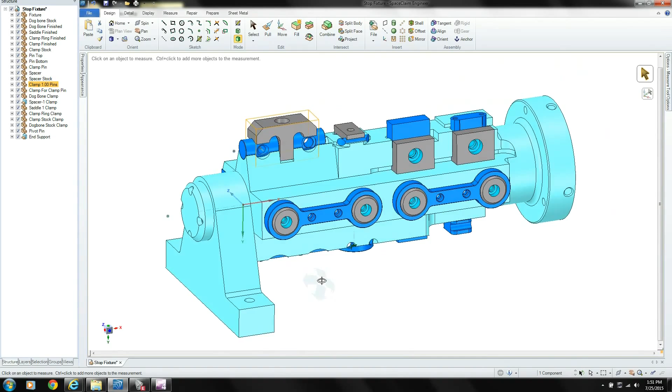Okay, and now we're going to get into a little CAD and CAM programming for the machine. What you're seeing on the screen right now is a model of the fixture that I've drawn that we're going to use to make the parts for the mill stop. But right now we're going to be focusing on this clamp right here that holds the two pins on the fixture. And in order to machine this, what we have to do is we have to open the part up.

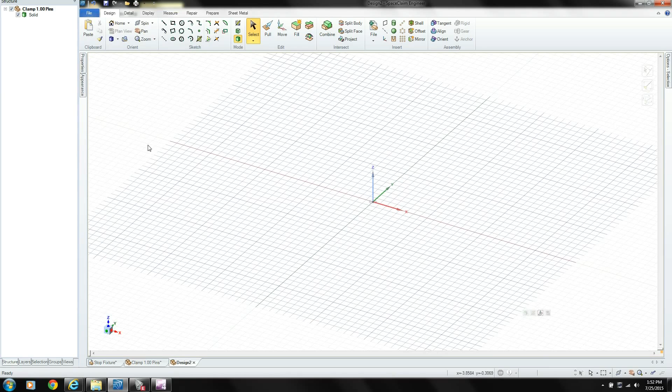So we'll open the component by itself, and you can see where the world origin is in relation to this part. We would have to move it in order to machine it, but we don't want to move it here, because if we move it here, it'll move the part in this assembly, and we won't want to do that. So we have to start a new design, they call it here, just a new file basically, and we got to go back to the part here, select the solid, copy it, go back to this new design, and paste it.

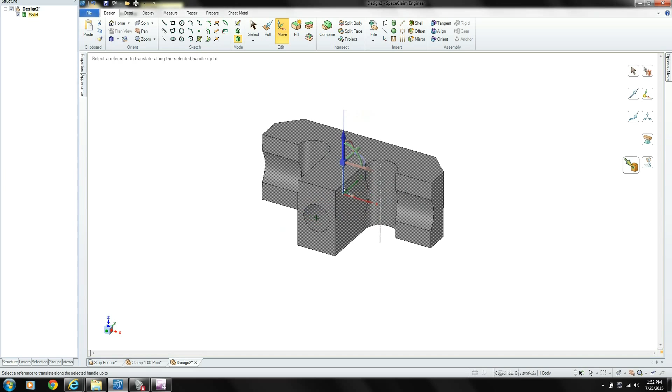Now we can move it, and it won't move it in the model because we're basically making a new design here. So we're going to move it to the world origin to begin with, and then we're going to select this top face, and we're going to move that face down to the origin point. So that would be our Z0 in the machine. And then we're going to select this face here, and we're going to move it to the Y origin.

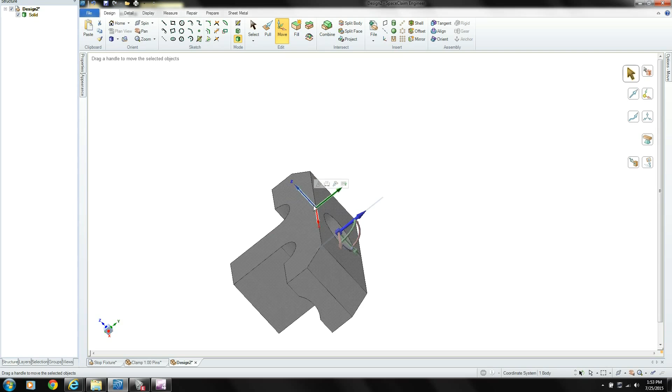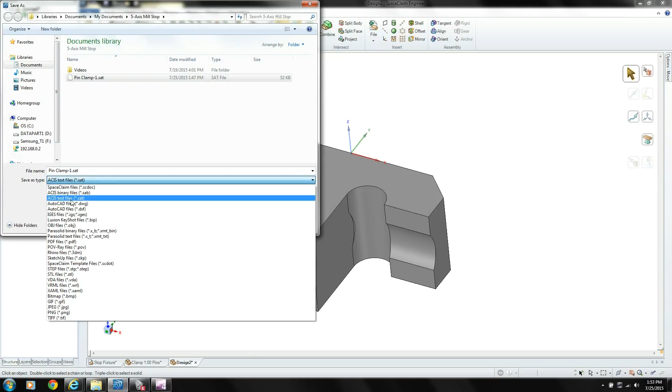Oops, not like that though. We got to select the whole model, and then we got to select the face, and then we got to move it over here. So now we have it repositioned for the machining, and then we're going to go over here and we got to save it. Actually, I had one already saved here, I guess, as this pin clamp -1 SAT. We're saving it as an SAT format, ACIS text file format, so that we can bring it into the CAM software.

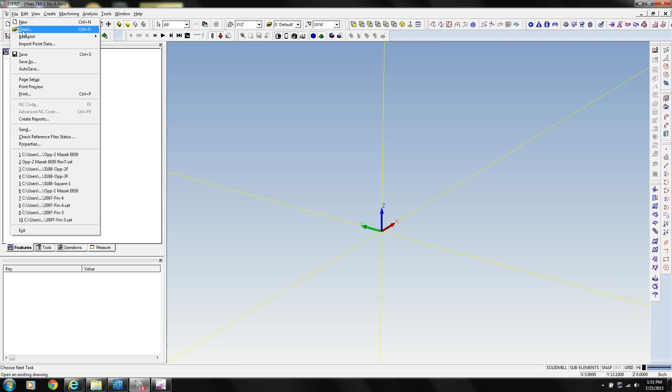Okay, now that we got that done, we can go over here to the CAM software. I already had it open, and we're going to start a new file, and we're going to use the template for the little Haas TM1 mill that's behind me here. So we're going to open that up first, and then we have to merge a file of this model into it. So we got to scroll over to where I saved that right here. Here it is. We'll import it into the software.

Okay, now I'm going to select this model, and I'm going to put it on the solid model layer, just so we can organize things a little bit here. Then up here I'm going to select the geometry layer, and we're going to make wireframe geometry of this model, which in this software, the Esprit software, they call smashing it. And you got to make sure you've checked wireframe and you got some kind of tolerance here, and then you say OK.

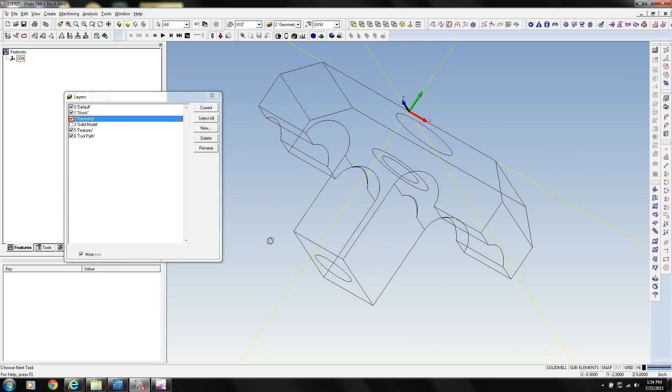If I turn off the solid model here, well, it should be on that layer. Let's see where it is. Yeah, we should be able to see the wireframe geometry by itself. Actually, we're going to use more of this wireframe geometry in this case to machine with, rather than a solid model. I'm going to put this on the feature layer. In a minute we're going to define some features for machining around this.

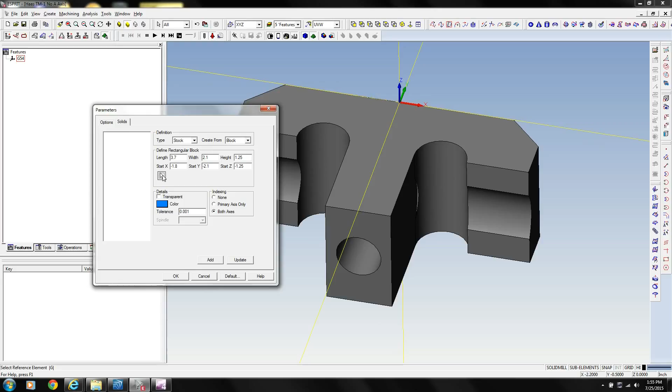For right now, we're going to define the stock for simulation, which is going to be here in this software. And right now it's set on block, so that's what we want. So we're going to select the model, and then it's going to put a block around that model that is the actual size of the model, but that's not our stock size. Actually, our stock is a little bit larger than this. The thickness of our stock is exactly what we want to machine, but the

width of it, if I measured it here, is say about 2.1 inches, and this is the distance from here to here, and where this starts is minus 1.9 right now, but actually that's the total width of the part, so 2.1.

I'm doing this on the calculator right now so you can't see it, but minus 1.9, and we divide that by 2 plus 1.9. It's going to start at minus 2 inches in Y, and the length of this material, if you measure with the calipers here, is about 3.7 inches, and half of 3.7 is what, 1.85, and we got to add that, so we have a stock up here.

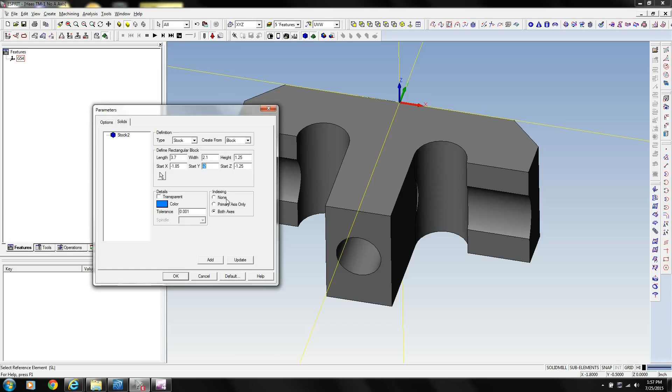And we say okay. So now we should be able to start the simulation and see that, oops, I got something wrong. I got to change something here. Minus 1.85. And we have to update that. And we say, okay, now our stock should be in the right place for our simulation.

Okay, the first thing we're going to need is a trim profile of the stock in order to trim our tool path off to. It'll be easier just to draw a simple profile to do this. So we'll select a line and we'll offset this.

Remember, on our stock definition it was 2 inches this way, and then it was 2.1 that way, and then this was minus 1.850 this way, and 1.850 this way. And we're going to trim off, or we're going to actually keep what we want here.

Now we're going to define a manual chain, they call it in this software. It's a feature just of this stock profile. We're going to rename that stock up here. It doesn't have to be named anything, but we're just going to do that so we can keep track of things. And I'm going to change this to the features layer here just to organize things a little bit.

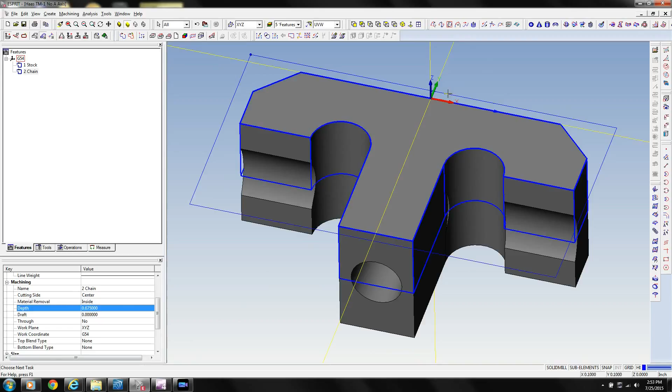What's going to be holding the part down, we're going to machine that radius here and this radius here later, and that's really the most critical part of the whole thing, and maybe the hole being on center line. The rest of this is just a clamp, and it doesn't really make too much difference. So we're going to do it half and half and just flip it over, run the same program.

So we want to eat out some of this stock here in these corners. Otherwise we'd be milling a full diameter cut through these areas, and we don't really want to do that. So let's define extra profiles so we can cut out some of this stock here. I'm gonna turn this selection to just geometry, so this makes this a little easier to do, even though it doesn't seem to do it sometimes. So

we're gonna take that profile, and we're gonna also go down 0.675 with it, and then we're gonna make another one over here, just the same thing basically, continuing on around the part, but we just want to take these corners and rough them down separately, and we'll trim the toolpath to this stock profile that we have here.

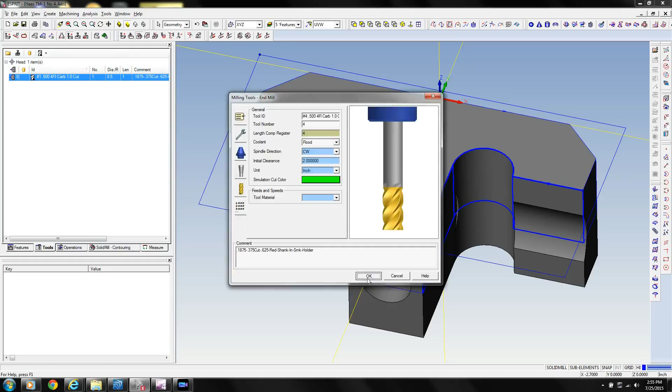So let's just do the first one here, and we'll go over here and we'll call it, I'll tell you what, let's see if we got a tool defined. I defined this tool earlier. I'm going to change the tool number to 4 because I noticed I have a number 4 tool in the machine that's already the right size. So we're going to do that first. Then we're going to go back here to the contouring. We're going to reselect that, and we're going to leave those alone.

And I think we'll make this, let's try 4 passes going inward. That's going to be 4 passes. Well, you'll see in a second. And I'm going to go down the depth first and then move outward instead of doing the width. You'll see how that's different. I can show you both ways just so you'll see.

Finished stock allowance, say 10 thousandths. We're not going to put any finished stock on the floor because we don't care. There's no floor here actually. And these are the lead in and out movements. It'll start 65% of the cutter over. We might have to increase this to miss this stock. In fact, let's try 80%, and here we'll try 20% of coming outward. Let's just see how it looks.

For some reason it doesn't like my tool selection here now. I think because I changed the tool in mid. Let's just reselect it. It brings over the same information on these things. Shouldn't have to keep refilling it out on the... oh, I gotta select the trim feature here. Okay. So that's the toolpath for this. Let's see what this looks like on the simulation on this side. Slow this down. See, it's hitting right here, so we gotta increase the...

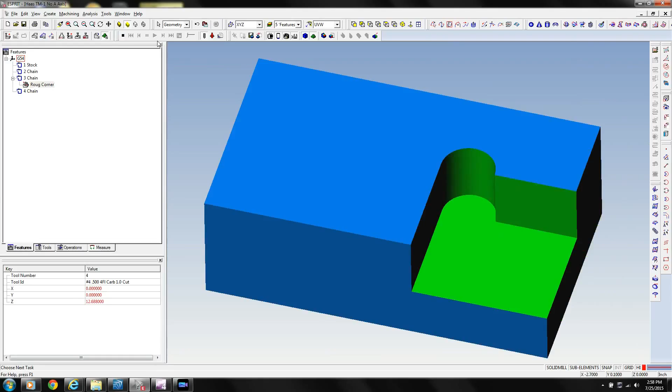I'm gonna rename this. It brings over the name that it was last used on the last program, so to rename it there. Let's go 100% of the tool, and we'll go 20% feed out dimension. Just see what that looks like here now. Okay, that looks pretty good. I'm thinking to rough this, maybe we won't take that deep a depth of cut. We'll go equals 0.675 divided by 5. We'll take it in 5 cuts down, like that.

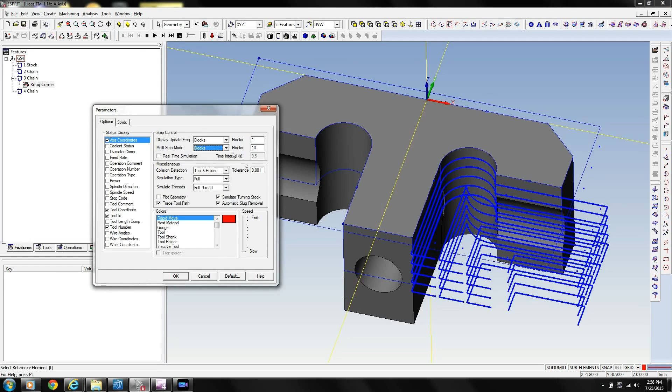I'm going to set something here so we can actually see this simulation. It's doing it every 10 moves, and we want them to be able to see it. Just slow it down a little bit. So we're just getting rid of this material in the corner here, so we don't have to have a chunk of material dropping off on the second side, basically, is the reason. Okay, that worked pretty good for there.

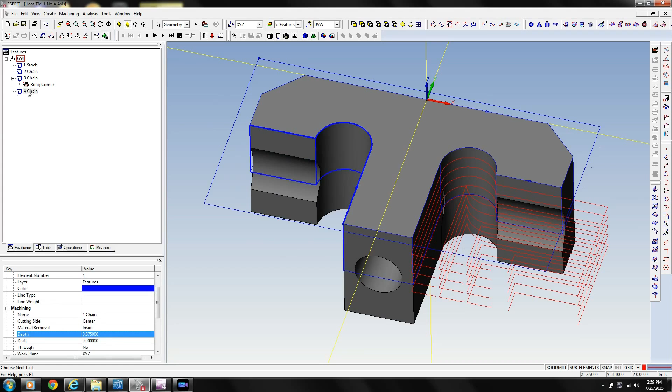So what we're going to do, we're going to take that and we're going to copy it and we're going to paste it on this other profile here. Let me do that again for some reason. I'm not sure. Oh, I don't have any depth on that profile. That's my problem. That's why it didn't give me any depth. 0.675, right? Forgot to do that. Now it should give me the depths.

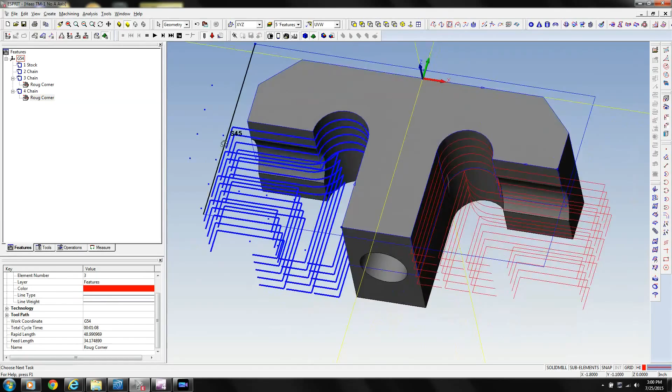And I'm thinking, looking at this, that I'm going to make a couple little adjustments here. Let's see if 80% will clear the material here, and we're going to go about 30% to get out to the full edge of the material, maybe about 35 here. Let's see if that hits anything. Oh, what are we doing here? Let's see. This pass here is giving me a problem. See what we get when we put 5 passes on here. Nothing.

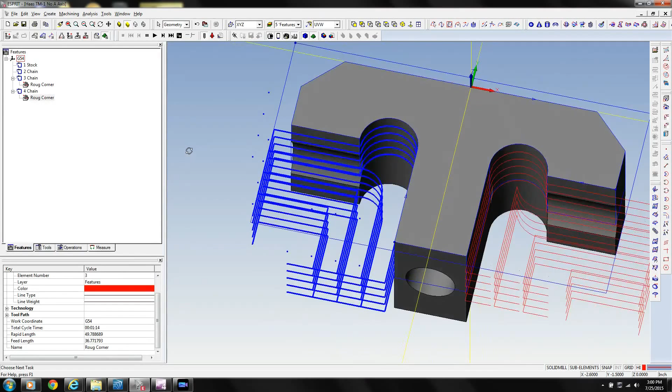Sometimes I don't really want to increase the lead in there. Let's try the step over amount. Let's just make it 4. We'll go back to 4 here. Let's go 65% maybe. That looks a little better. I'm not sure if we're going to get rid of that whole corner that way. Oh yeah, okay. Let's see if I put in 5 passes here. See, it's going to hit again here with this lead-in movement, so we don't want that. Go back to 4.

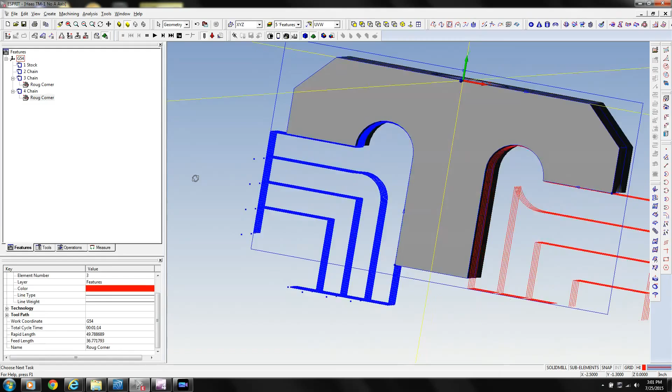Go slightly more, 55. Let's see if that still isn't right. Nope. 50. It'll clean it off like that. Let's see what this one looks like at 50%. Let's see what the whole thing looks like. It's taking a little bit deeper cut right here, on this first little chunk of the corner, but it'll probably be alright. We'll let it go like that. So we're just getting rid of all of that stock in the corners.

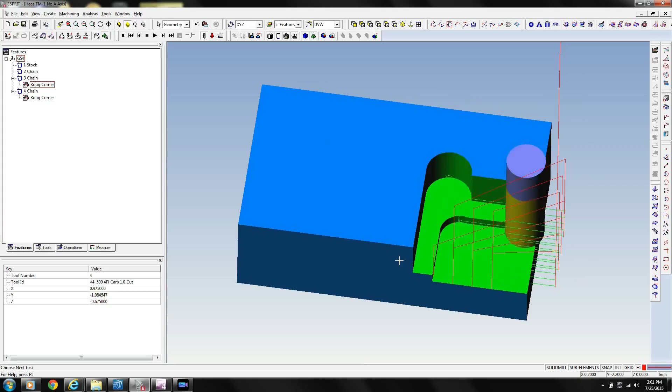And if we wanted to really be clever, we could put an increased finish stock on here so that we take a little more off the profile cut. Which, we could try that. Let's see what it does.

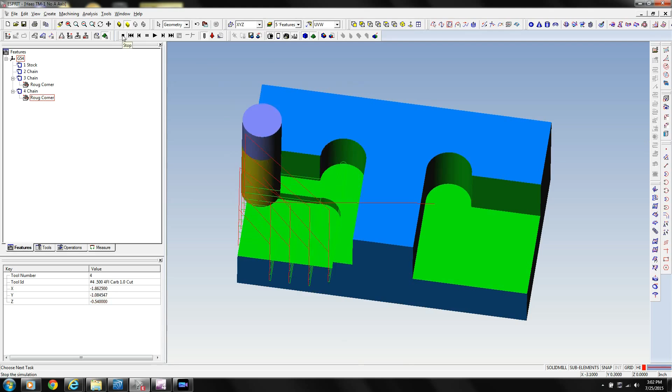Let's put a finished stock allowance of 60 thousandths. Let's see what that does on these. And 60 on this. Let's see if that gets us. Oop, I entered that wrong. 60, not 600 thousandths. See if we can go even more. Let's see what happens. 0.1.

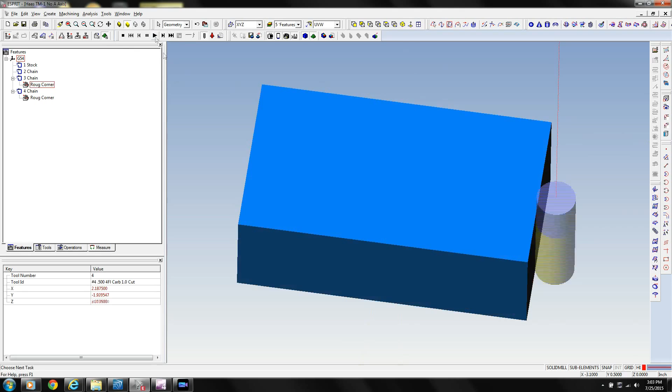Okay. Now, that was just the one side because I had it selected. Oh, it doesn't like that now again. Let's see. I'll go back to this 0.060 on both of these. You'll see in a second why. So I'm going to copy one of these and I'm going to paste it onto this outside profile. See where we come up. So we don't want to do that.

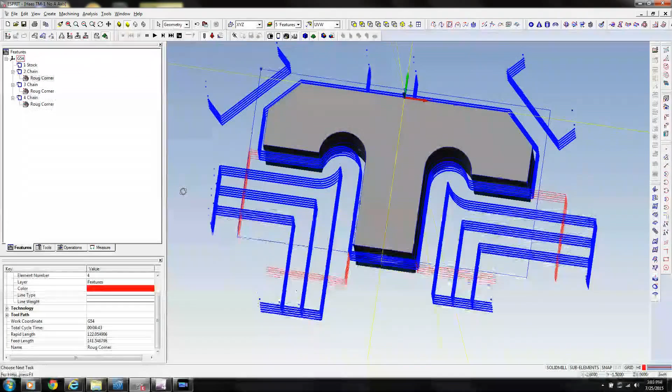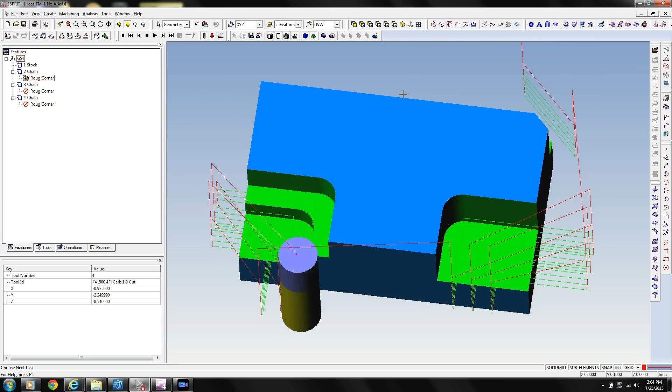Well, let's see what that looks like. We're just going to suppress these. Let's see what it looks like, if it hits anything. Might work just like that. I think it's going to hit something up here when it tries to do that profile. See, it's cutting a lot of air. Yeah, see, it hit and collided there. So what we want to do is just change this to one pass like this, and we don't need that much overlap on the tool.

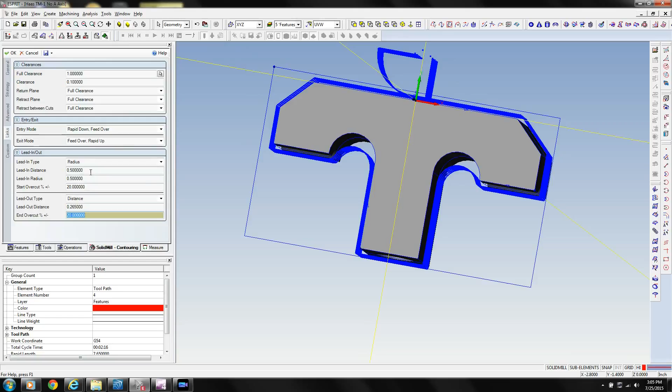In and out feed movements, we'll say 20% for those, and the distance coming out's all right. We're gonna do a radius going in to maybe blend that in a little. Oop, we don't want to do it on both ends. This software automatically changes everything on you, and we don't need that big of a lead out. 0.265 is a little bigger than the radius of the tool, and like this. That might still collide there. Well, let's try it.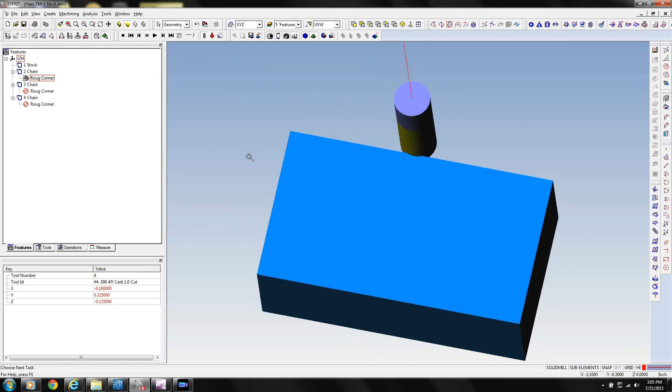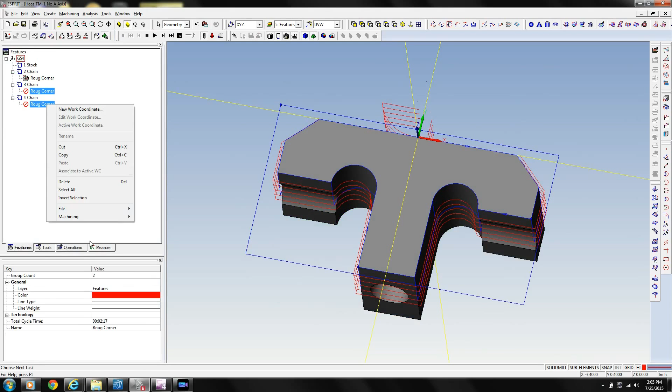Yeah, it's colliding with the stock still right here. So we got to make a little bit more of this. 1.375, we'll say. 265. Okay, we got to unsuppress these two, and we'll select that one. We'll see the simulation.

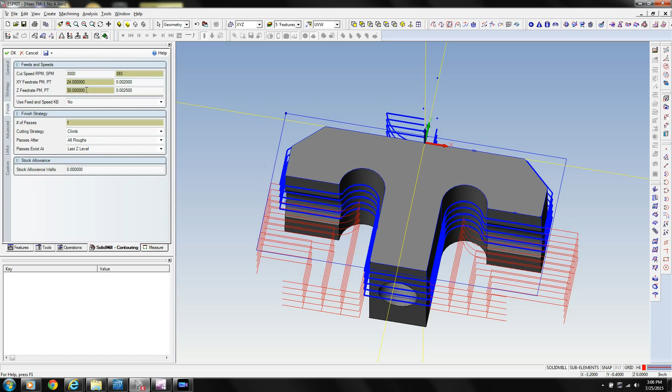Oh, we got the stock set the same. Stock, we got to set this to 0.005, we'll call it here, and then we're going to do a finish pass on this one. And we're going to do that at 3,000 RPM, 20 inches per minute, maybe a little faster, 24, 30. We're actually rapiding down, so we don't need to even worry about this plunge feed rate, but let's see what that looks like. So it's going to rough down in steps here, and then do one finish pass after it roughs the steps down.

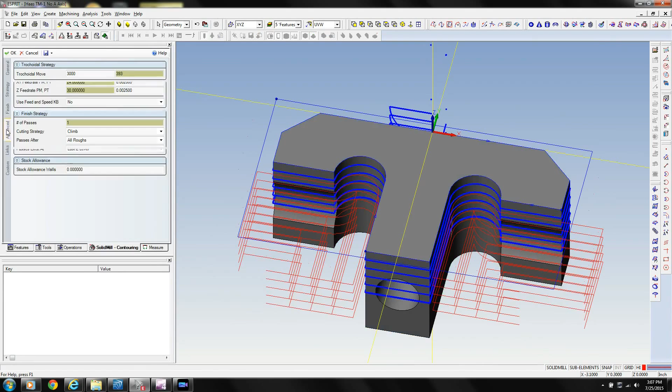Now, we can actually tell this software to put corner breaks on these corners. Might as well do that while we're here. Be in the advanced strategy, clockwise, let's put 15 thousandths on there. So now this tool should put a corner break on every outside corner on its finish cut. You see the difference here? It's got a little corner break. Okay.

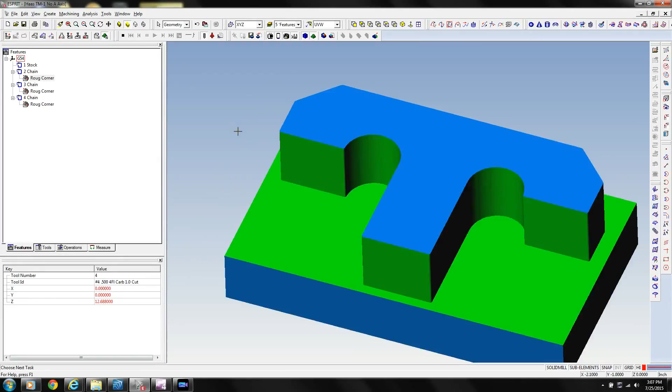Okay, so that's basically the milling profiles we want to do. We're just going to use one tool to do this with, and then we're gonna flip the part over, like this, and we're going to do the other side, but it's going to actually just be the same exact program. So that's it for the CAM part, except for processing the code, which we can go in here and we can set that parameter. We call this pin clamp-1, we'll call it. Program number, we'll leave that alone. We can rename that if we have to.

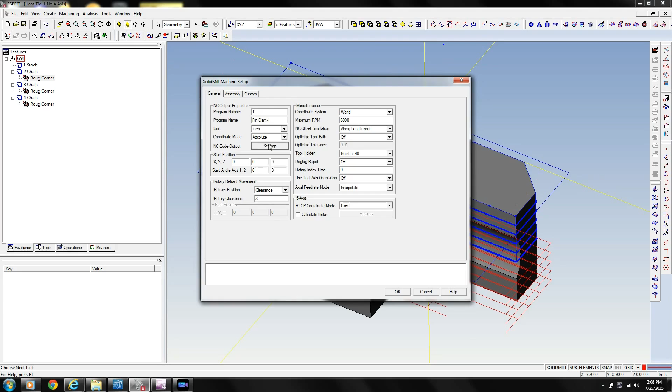And this, we want to select Haas 4th axis wrap. I don't use this machine a lot this way, so I gotta figure this out every time I do it. Which post processor? TM1. Because I don't. See if I got one saved here. I'm gonna stick with this one here and see what that gives us. Might be all right. I'm gonna browse to the directory we want to save this in.

Just save it in the 5-axis mill stop, and we'll call this again pin. Oh, what do we call it? Clamp. Pin clamp-1, right? Okay, we'll process the code. Let's see what the code looks like.

Somebody wrote this post processor, and we don't really care about any of this stuff here. Let's just see if this looks like it might work all right. I mean, it doesn't look like it's turning the coolant on, but let's see if we're putting our cutter comp on. Yeah, we are for this profile. This looks like it might work all right, so we'll leave this alone. We might have to add an M8 here.

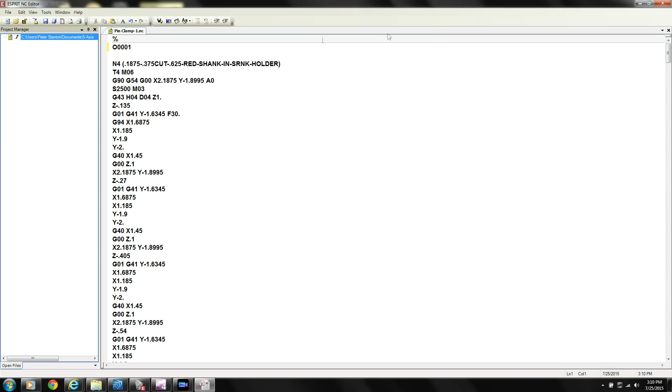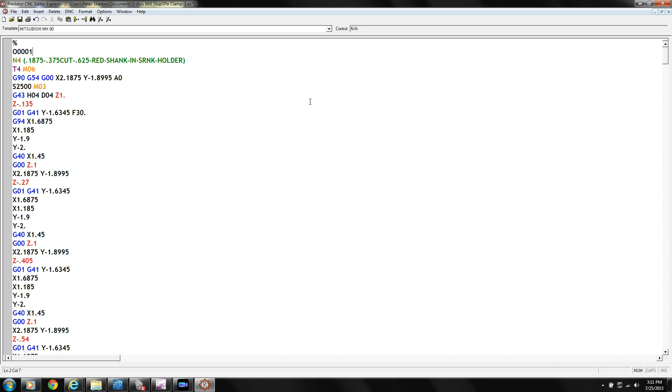I'm going to jump over to a different software to actually download this to the machine, which I've got to hook my cable up and everything. So we're going to open this up in this Predator software. I like to use this. It's going to be this right here. And let me get the machine all ready to go and everything, so I'll be right back with you on this in just a second.

You may have noticed that the description of the tool is off. I got in such a hurry I didn't change that in the tool setup. Here we are touching off the Z-axis with the probe on the raw stock. And now we're going to set the Y 0. It's going to probe both sides of the stock and set it in the middle of the material. You'll see it kind of jumps over there a little bit. That's the center of the material.

Now I'm going to manually jog it over in Y and down in Z, and then run the probing cycle to get the Y offset 0 point. And there it is, it's touching the Y off now.

This next segment, I didn't have the camera turned on. I had to restart it. The GoPro cameras, you can't tell sometimes if you've got it on or not. So basically we're cutting the air of the first cuts because I forgot to turn the camera on.

Okay, now I sped up the video so we don't have to go through all this at normal speed. It's going about 2.5 times the normal speed right now, just to get through this machining segment here. I don't know if you guys are interested in seeing this stuff, but I've watched it so many years, it's kind of a little bit boring to watch just the tool machine away. But if you're interested, I can slow it down in future videos. To me, I just want to see what it's doing, have it happen quicker.

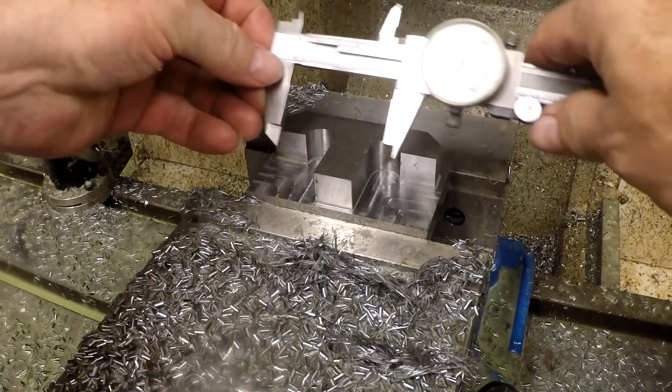And that's pretty much the finish of the first side. And I'm going to clean things up and flip the part over. But first we've got to set the 0 point now that we don't have a good edge to probe on because it's overhanging. I was checking the width of that just to see if it was pretty close. It's supposed to be 3/4 of an inch.

So in the next segment we put a gauge block in there and set the mill stop over there, so we probe the x-axis here and then add half the width of the part onto it so that it sets it over in the center. So that's what I'm doing right there. And then I go and probe the y-axis, which will be my new 0, basically right at the vice jaw.

And that's the way I did it. It's not a real accurate way to do it, but it's good enough. This is just a clamp. And if we get a slight amount of mismatch on the first side and the second side, it doesn't really matter that much. Although actually it turned out it worked pretty good. Well, you'll see at the end of the video. So I probed the new Y0 there.

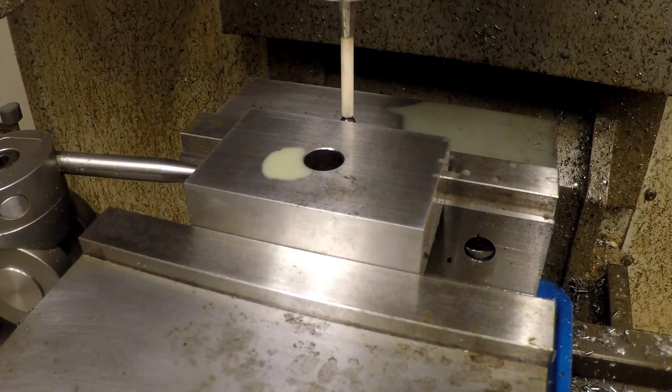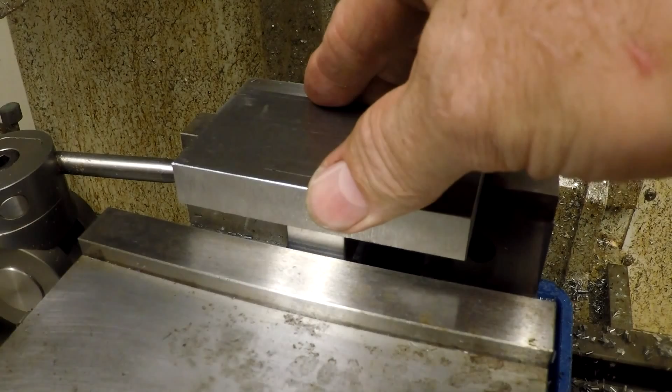Then I'm going to jog the probe away. It sounds kind of loud, that noise, doesn't it? The jogging the machine. Take the gauge, the 1, 2, 3 block out of there, and then put the real part in, up against the stop, tighten the vise, and hammer the part down a little bit to make sure it's down on the parallels.

So I'm checking it. The parallels are kind of loose right now, so I'm going to hit it with a dead blow hammer. First I got to jog the probe, it's kind of in my way there, and hit it with the dead blow hammer a little bit. Check the parallels again, make sure they're tight on both sides. And then we're going to go to machining the second side here.

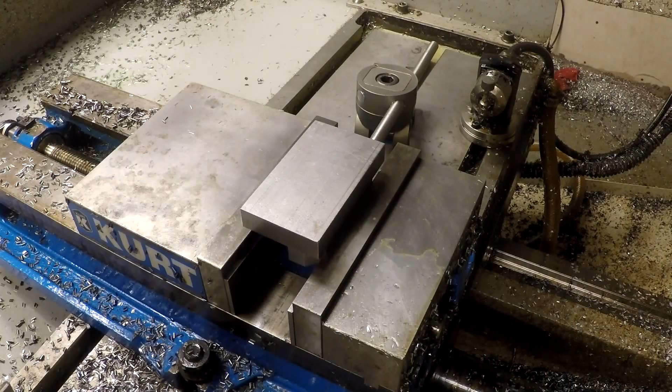It's coming down to do that, that's the tool change you're hearing, the air blowing, the tool changer. Come over here. I didn't like the frame of the picture, so I kind of moved the GoPro camera a little bit here just to get it framed better in the center of the screen.

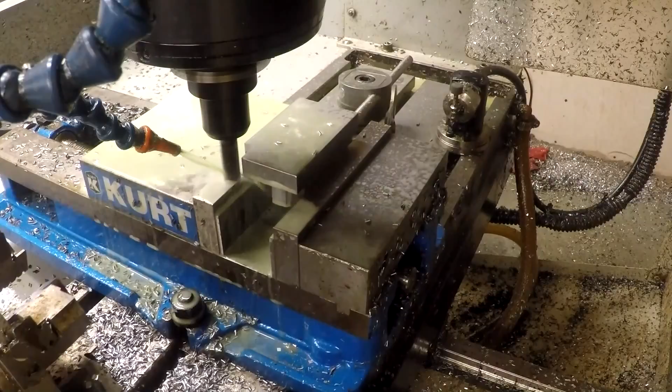Okay, here again I'm showing a little bit of the first cuts at normal speed, and then it's going to speed up to about 2.5 times the normal cutting speed, so we kind of get through this quicker. And the sound kind of cuts out when you do this. I'm not sure. I guess this software that I've been using, maybe that's just automatic with it. When you change the speed of the video, it mutes the sound. I guess it's just as well, it would sound kind of funny.

So we're just eating off the corners here, so that we make our profile cut. We're not cutting a full diameter of the tool going around inside those corners. So it's almost got it there. It's going to come around, cut around the whole part here in a second.

You have to kind of excuse how dirty the machine is. I mean to clean it up, but I never get around to it, and then I get busy with something else and at work and everything, and I know it looks kind of filthy. Someday I got to get around to cleaning it up. But fortunately, I'm the only one that uses this machine, and so it's not like somebody's coming after me.

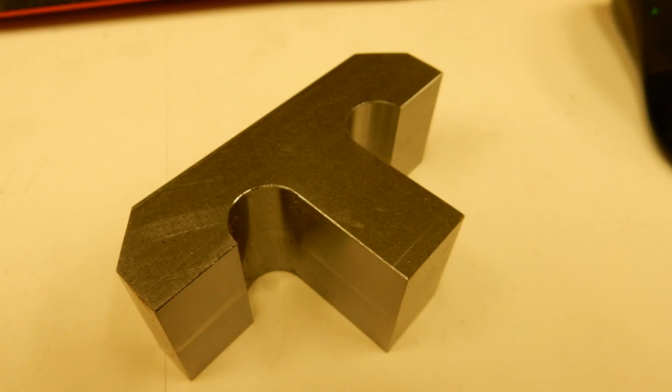Okay, here's how the part turned out. The mismatch was pretty good. It was a lot better than I expected it to be. Here's another view of it standing up. So this video's getting kind of long, so I was hoping I could show this whole part being made, but it takes a lot more time than you'd expect. But anyway, this is the next setup, so I guess I'll have to wait till the next video to get this part complete.